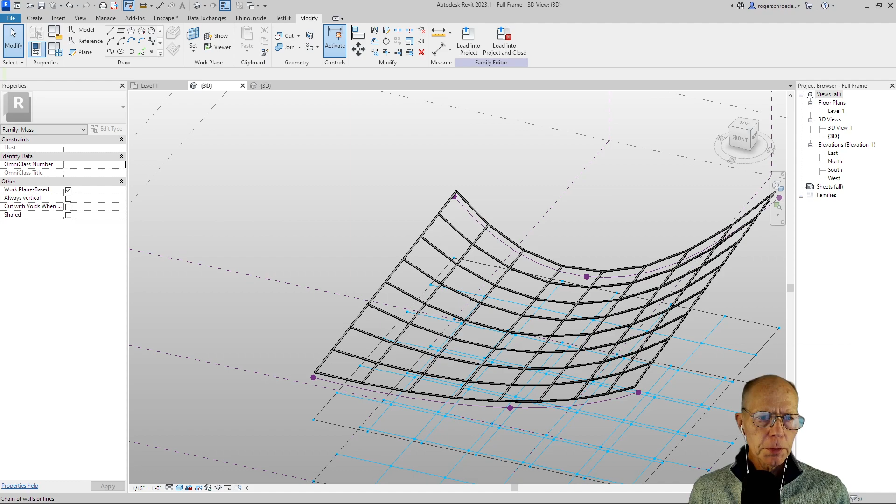Now let's start building that triangulated shape that will give our structure to our space frame, as we've discussed in the lecture component of this course. So I'm going to go back to the unit frame, and actually I'm going to go to wireframe so we can see through it. And we're going to make some reference lines. So this is a little bit involved, but just follow along. I think you'll have no problems.

So the first thing I want to do is put some reference points on the bottom reference plane so that we can draw some kind of an X or set of pipes going across. So I'm going to go ahead and try to roll until I get to the center. A triangle will show up when I'm there. I'll click and place a point, and I'm just going to walk around this whole thing and place these 4 points. And notice how I'm waiting for the triangle to show up.

Now we're going to draw some reference lines between those points. And I have chain on, so I'm just going to turn that off and start another line again. And actually I'm doing this one in 2 parts because, well, it doesn't matter. We can do it either way. You'll see as we move along.

Next thing I need are these kind of the really triangulated shapes. So once again, I'm going to grab the reference line and draw from here to here. And we don't have the chain command on, so I'm going to restart it and click it over to here. I'll come up to here, grab this point, and come down and touch that point. And I'll do the same thing again and come to this point.

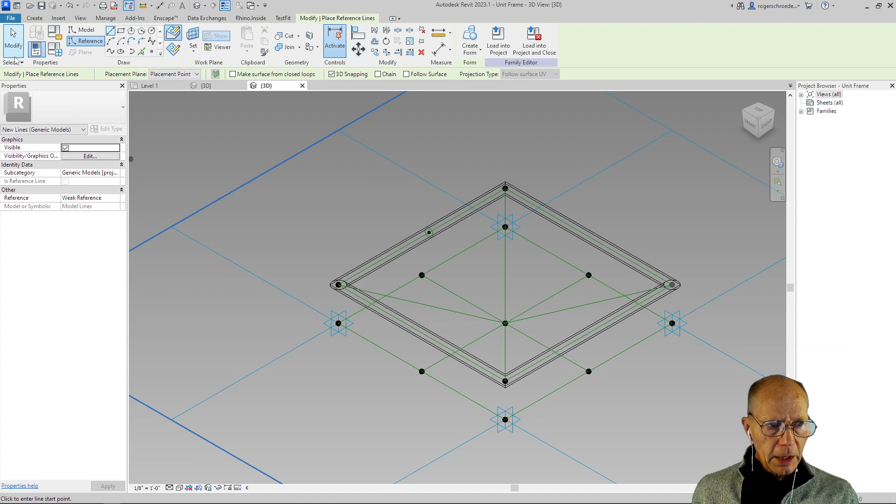So now let's just check out what we've done. So I'm going to hold down the Shift key and the center mouse button so I can rotate around a little bit. And I'm going to move some of these components to make sure that we've got adaptive behavior happening here. And it all looks pretty good. So I'm going to undo all of that with Control Z till it's back lying flat.

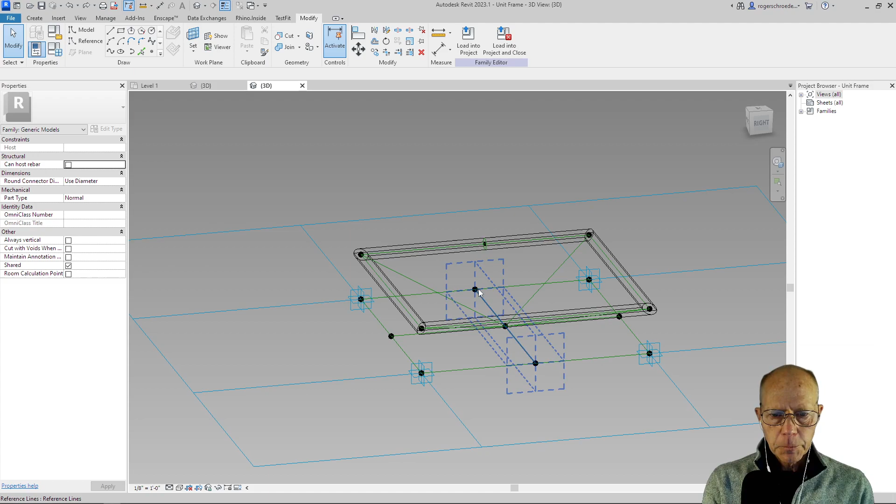Now we're ready to actually kind of extrude out some of the pipe shapes. So I'll do that on these top pieces first. So I'm going to just zoom in here and I'm going to place a point on that line. If you hit reference, it goes there. So I'm going to place a point there. Actually, I'm going to go through and I'm going to just place all the points right now. These are just random points that we need in order to create some circles. And then I'll start placing some circles, which will be the extruded pipe.

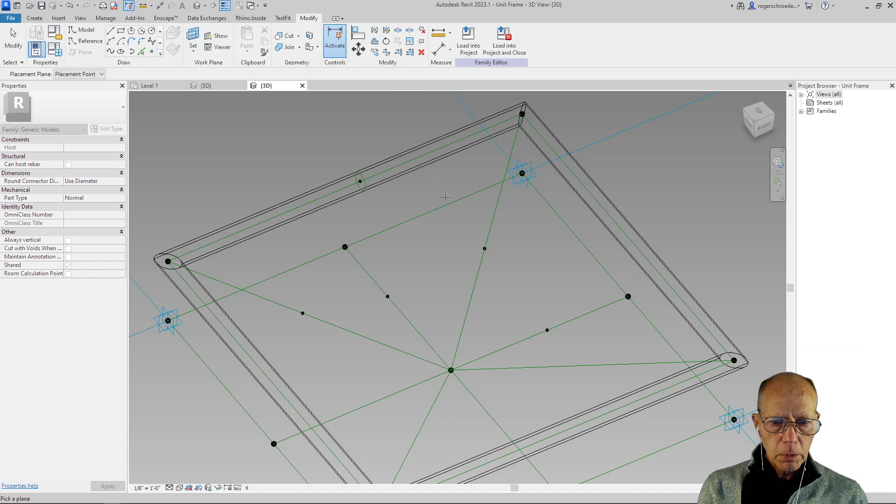So I'm going to grab the circle tool. I can make these as references, I believe, and I'm going to set a working plane first. So I'm going to roll onto this until this looks correct. Now if I hold and rotate, you can see how that plane is working, and that's the correct way for it to have that orientation. So I just want to make sure I set that. Let me go back and do that again.

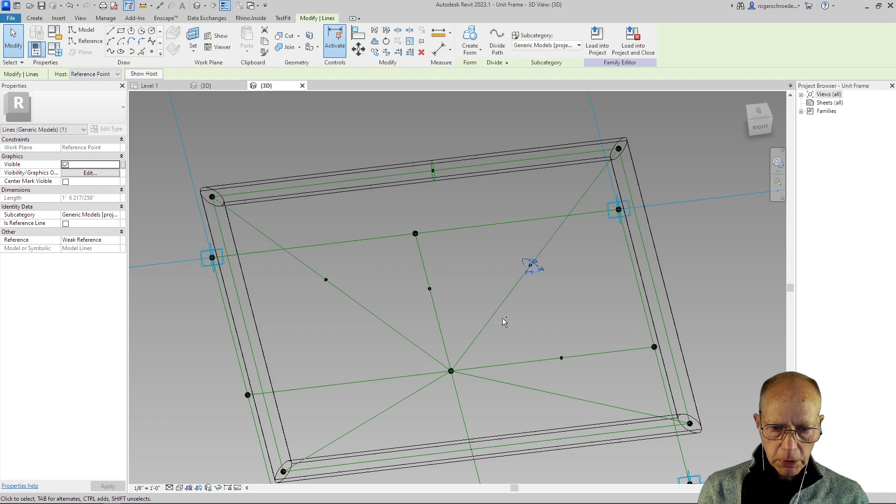And now I'm going to go ahead and draw a circle. And I'll leave it as a model line. I don't think it really makes any difference. We're going to do that 3 inches in diameter. So that one is created. And now we can actually extrude that. So I'm going to grab the circle, hold down the Control key, and grab these 2 reference lines. And that's going to create a form across all of those surfaces. There we go. And now we're going to do the same thing over on this side over here.

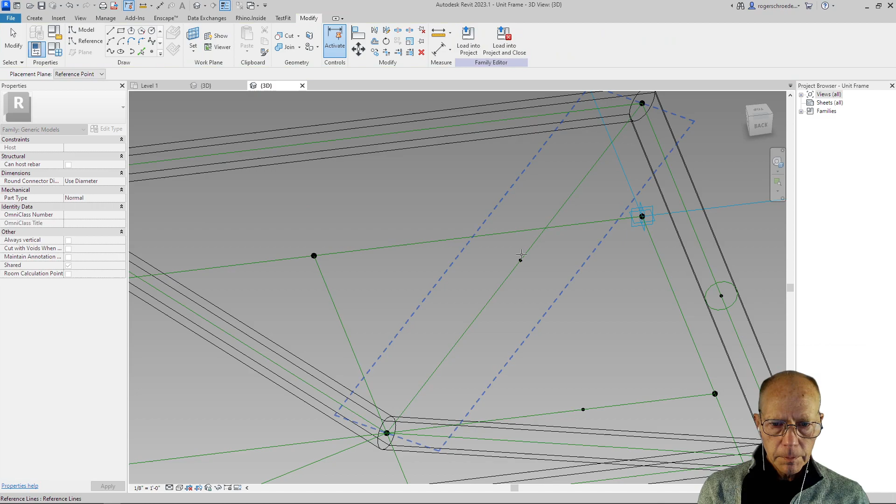So actually we'll kind of rotate around here a little bit, give you a little better visualization. So let's once again set the reference plane for this circle. And then I'm going to grab the circle tool. And that's a little too steep on the angle here. Let's try that one more time. And now I can touch that and pull out that 3 inches. And we'll go ahead and extrude that out.

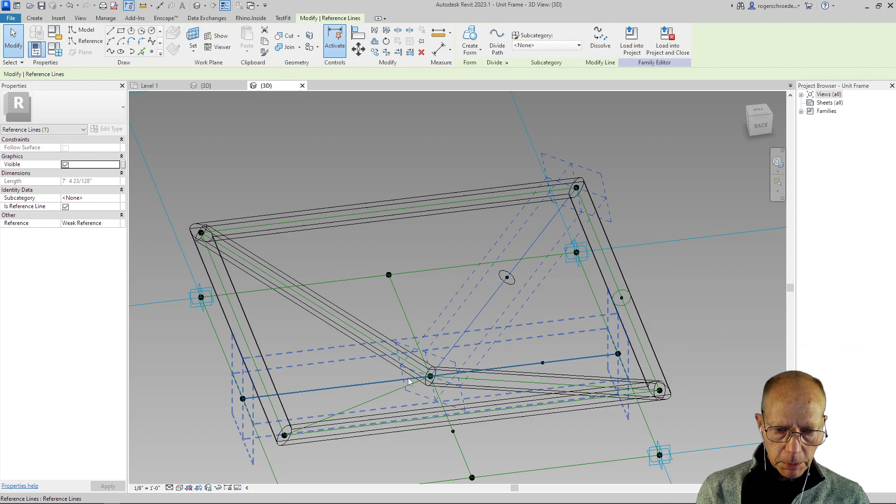So I'm going to grab, let me zoom out here a little bit. I'm going to grab the 2 reference lines. Oops, sorry. Holding down the Control key and the circle. And we're going to go ahead and create a form. And then we're going to do the same thing for the bottom one.

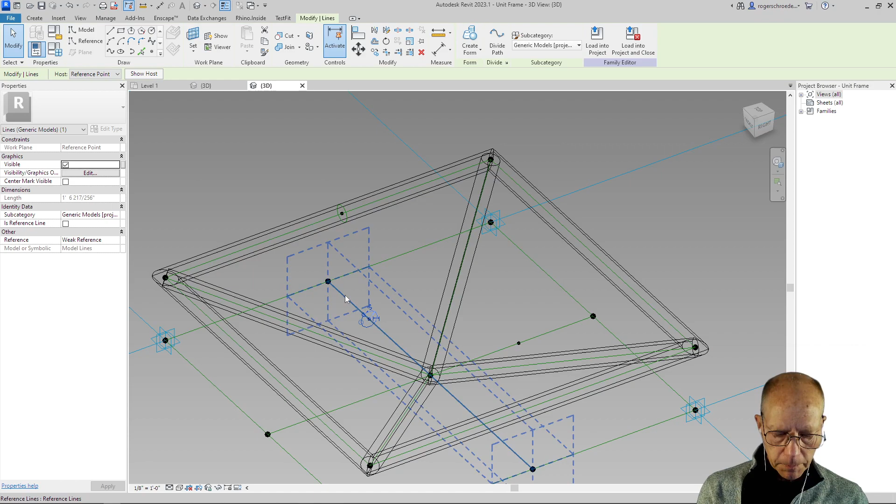So actually, let me just rotate around here. Once again, we're going to set a reference plane and draw a circle. Oh, I hit 3 inches. Then we can go ahead and grab that circle and the single reference line. I'm going to go ahead and create a form. And then we're going to do that one more time in the other direction.

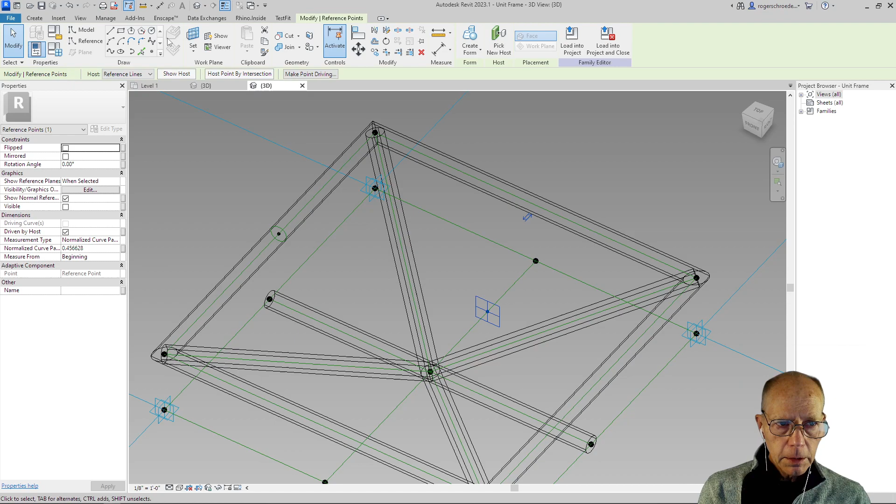I'm going to set our reference plane and then a circle. Oops. Let's try that again. Once again, if anytime you're having problems, take a note of what is active on the screen that I have there in case yours might differ. So that's 3 inches. And then once again, I made 2 reference lines here, so I'm going to hold this one. And I'm going to also grab this one. So we have 3 common elements. We'll go ahead and create that solid form.

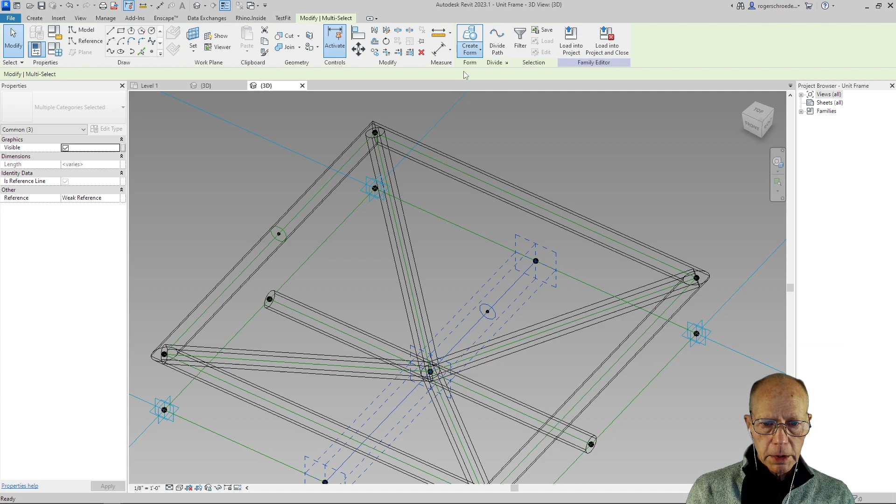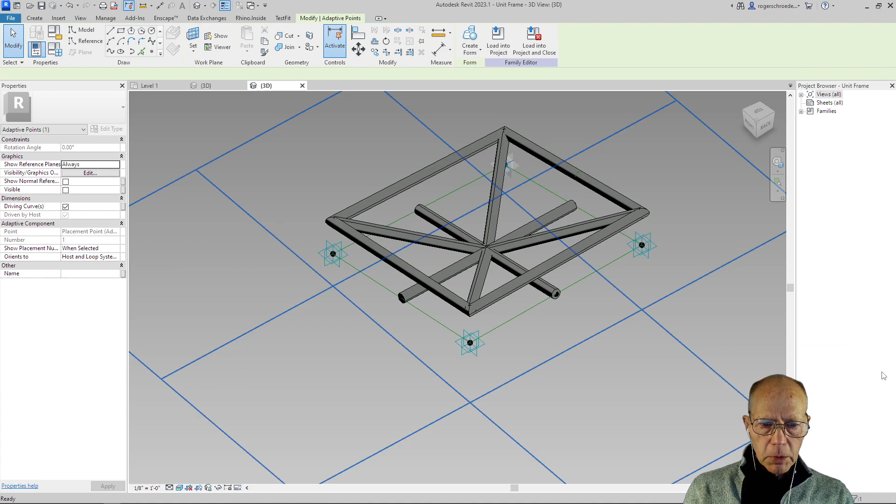Okay, so now I'll go back to, I guess, a realistic rendering of it. And we'll kind of rotate around so you can see what it looks like. And then the last thing I want to do is go ahead and check out these adaptive elements to make sure that they're behaving adaptively. And sometimes I'll get a little error or tweak like I did with the 4th one there. And I've been able to ignore that warning saying it's a little inaccurate. We may have just deformed it more than it's capable of. And then I'm going to just settle this back down again onto the plane by just doing Control-Z, now that I'm sure that everything works. And we'll go ahead and save this.

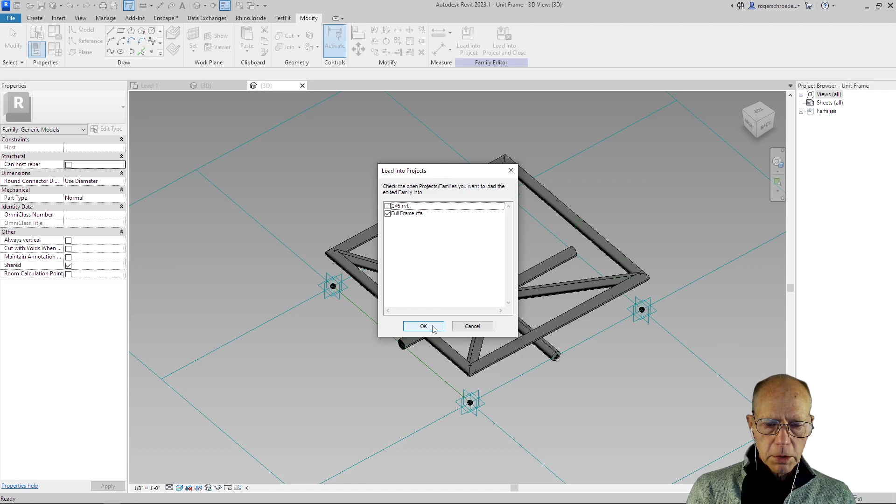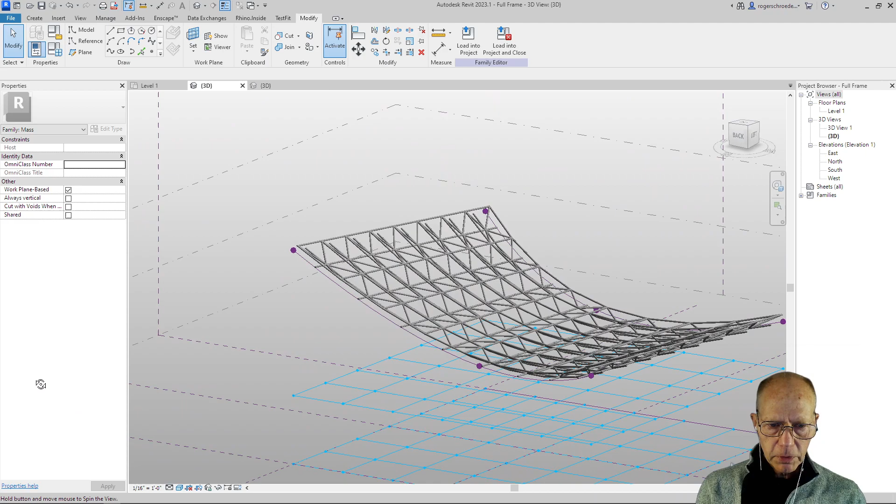And then we're going to load it back into our conceptual mass element, the full frame. So I'll click OK. It's going to overwrite the existing version, which is fine. And we're going to need to give this a second because it's populating a relatively complicated kind of a surface. It's asking to save it. That's fine. And there we have our grid system. And quite impressive for the amount of work. I know it might have felt a little tedious to start with, but we can modify this shape to be anything we want and then quickly repopulate. So I think next we'll look at making the adaptive column.